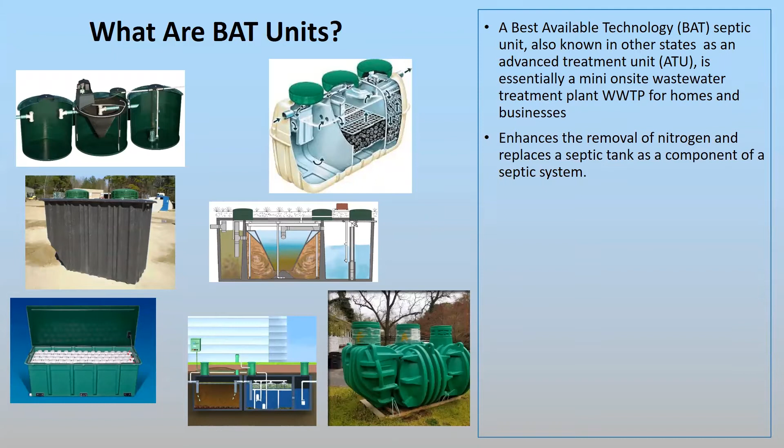So, what is a BAT unit? Essentially, a BAT, also known as an aerobic or advanced treatment unit, as they're known in other states, is essentially a miniature wastewater treatment plant, and it replaces the septic tank portion of a septic system. So you would have a BAT unit directly post the house, and then effluent from the BAT would then go into your existing drain field.

And they are used to enhance or reduce the amount of nitrogen and organic matter that enters the drain field. Now, these systems are required by law in Maryland for certain locations. They have gone through an extensive field evaluation. Essentially 12 units have been installed for over a year, and they've been monitored, water quality analysis, et cetera, and they've been verified to reduce nitrogen by at least 50%.

And then in Maryland, we have what's called the Bay Restoration Fund, which provides grants to homeowners and businesses to install BAT units, and more on that later.

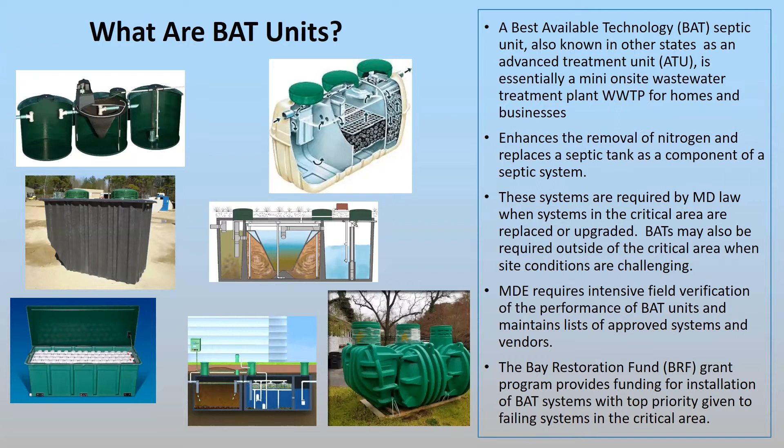So why would you upgrade to a BAT unit? It's important to note that a conventional septic tank provides very little treatment, essentially about 5% removal of the nitrogen. A septic tank is designed to store volume, to settle solids, and to allow any sort of fats, oil, and greases to float up, thereby separating it from the wastewater, which then would enter the drain field. The drain field in a conventional system is where the vast majority of treatment occurs, generally in the neighborhood of 25 to 50% nitrogen removal.

So again, BAT units significantly reduce nitrogen, organics, and the oxygen demand of wastewater. In other words, when you have a lot of organics and a lot of bacteria in that water, bacteria are feeding on the organics, and in order to do so, it requires a lot of oxygen, and that's what a BAT unit essentially does: one part of that unit provides that oxygen to supply the bacteria with what they need in order to break down organics.

And they are very effective in not only reducing nitrogen, but reducing organic load, and therefore they are good solutions for especially environmentally sensitive areas. And in Maryland, the BAT program is focused on the critical areas of Maryland. That's 1,000 feet of navigable waters.

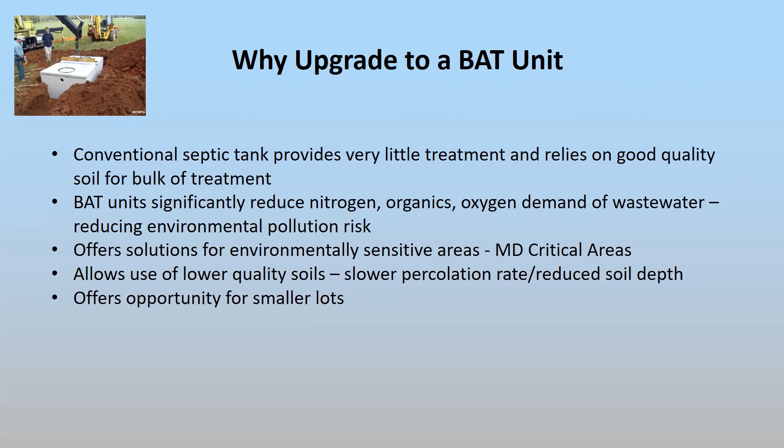And again, they're a good option for smaller lots, and the reason for that is that they provide enhanced treatment, as I mentioned, and that enhanced treatment can help prolong the life of an existing drain field. And on small lots where you don't have any sort of replacement area for the drain field, this offers an opportunity to utilize the existing drain field for a lot longer period of time.

BAT units come in various sizes and can be designed for different size homes and different types of businesses. So they're capable of handling larger flows and also capable of treating varied strengths of wastewater. For example, food businesses and schools, nursing homes, things like that, where the wastewater strength, the amount of organics and oxygen demand and nitrogen greatly differ from that of typical household wastewater.

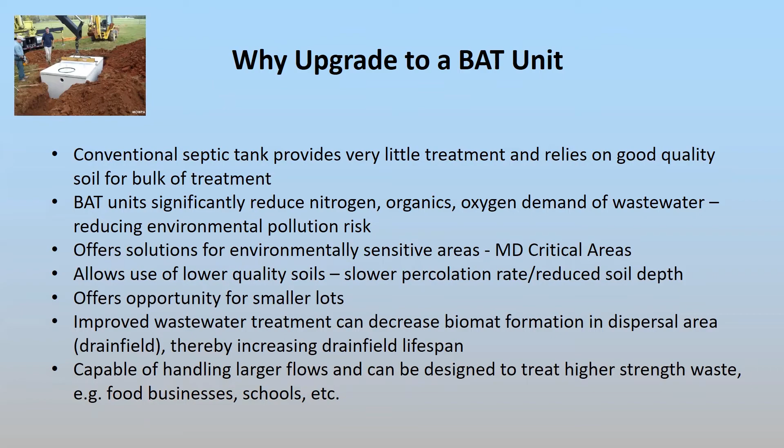Here is a schematic of a generic BAT unit. And basically it is a series of chambers that process the water. The first chamber is similar to that of a septic tank where the wastewater comes in from the home. The solids settle on the bottom and the fats, oils, and grease, also known as scum, float to the surface.

And then that water with lower solids and lower scum goes to the next chamber where aeration is provided to help oxygenate the water, to feed that bacteria so that the bacteria can break down the organics. And then from there, that water goes into another settling zone or clarification chamber.

And then from there, it can be pumped back, go through the system a second time to enhance additional nitrogen removal and organic removal. And then the water then goes out to the drain field.

Now, the important thing about this treatment is that it provides very clear and odorless effluent. In contrast to septic tank wastewater effluent, where it would be very dark brown, you couldn't see through it, and would have an odor. The BAT units help really reduce all the organic matter, the turbidity.

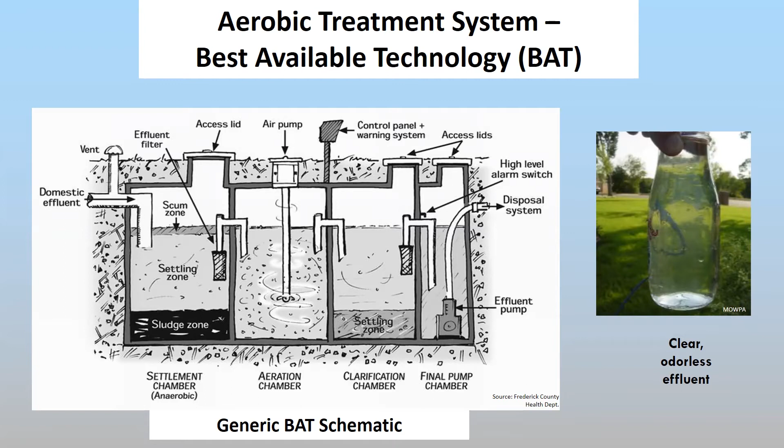And again, that's the reason why the program wants to install BAT units, because it has lower environmental impact, but then also the benefit to the homeowner is that this clear effluent, as I mentioned before, helps to prolong the life of your drain field because it's not adding to organic load that can clog the soil pores, which would then prevent water from infiltrating in.

So drain fields, as I mentioned, in a conventional system are a very important component of a system and provide the greatest amount of treatment, both reduction in nitrogen, but also organics, reduction and elimination of pathogenic bacteria. So the soil is doing a tremendous service in treating wastewater. There are several types, of course.

The more conventional gravel trench system, where gravel is applied to native soil, and then again, the number of trenches would depend upon the size of the home, etc. Then there's what's called chambers here, which basically these chambers are ABS pipe that's been cut in half. It has slots for the wastewater to leave the sides. It basically replaces the gravel, but they're a lot easier to install.

With all the drain fields here, the purpose is to spread wastewater out over the soil as much as possible. And that's what the gravel does. Here's another system here called EZ Flow Tubes. It's basically an artificial media, essentially replacing the gravel. There's the corrugated pipe that's actually inserted within the media. Ease of installation certainly is one benefit. And again, the purpose is to spread the wastewater out over the entire bottom of that trench.

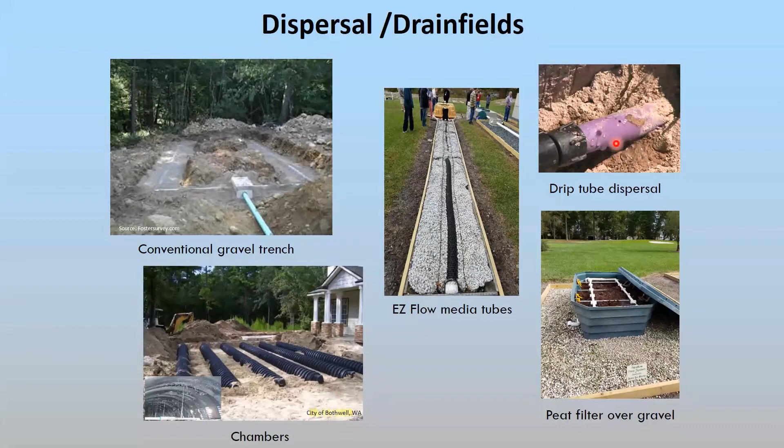In addition, in areas where there is no oxygen, other bacteria convert that nitrate to nitrogen gas, which is then vented off into the atmosphere. And that is good because our atmosphere is made up of about 78% nitrogen. So this is a cycling process, a natural biological chemical process that helps to reduce the nitrogen, and organics as well. And then, as I said, the soil is also remediating pathogenic bacteria.

But it is important to note that all wastewater, whether it's from a wastewater treatment plant or a septic system, does have impact on groundwater. Nothing is 100% removal. So as I said earlier, the septic tank removes about 5% nitrogen. The BAT units approved in Maryland remove 55 to 77 percent of the nitrogen. The drain field typically will remove 20 to 40, maybe 45, almost 50% of the nitrogen. So if you had a BAT and a good functioning drain field, you could remove 66 to 87% of the nitrogen.

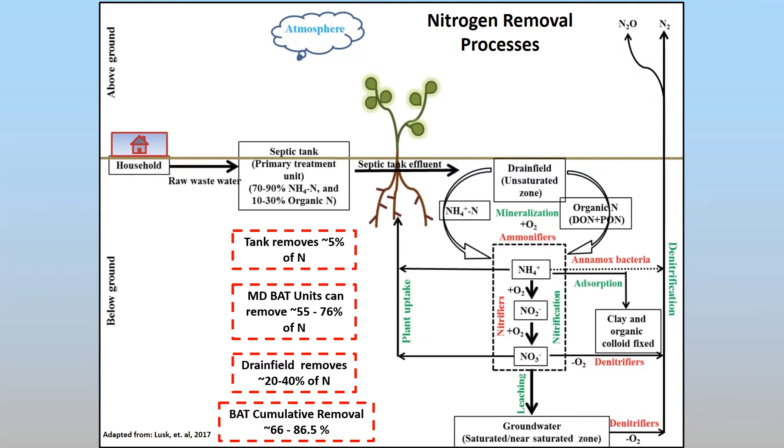The program provides installation and then also a 2-year maintenance contract. Now, it's important to note these prices are based on the Bay Restoration Fund. So if you were to buy a BAT unit outside the Bay Restoration Fund, the prices would be different. And then not all of these units are available in all counties of Maryland.

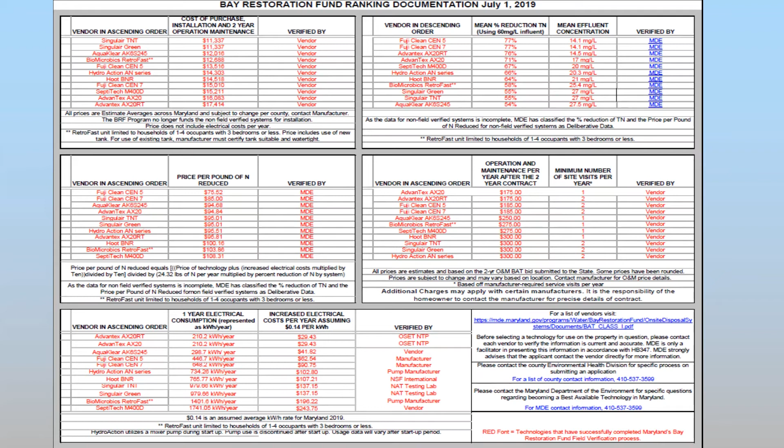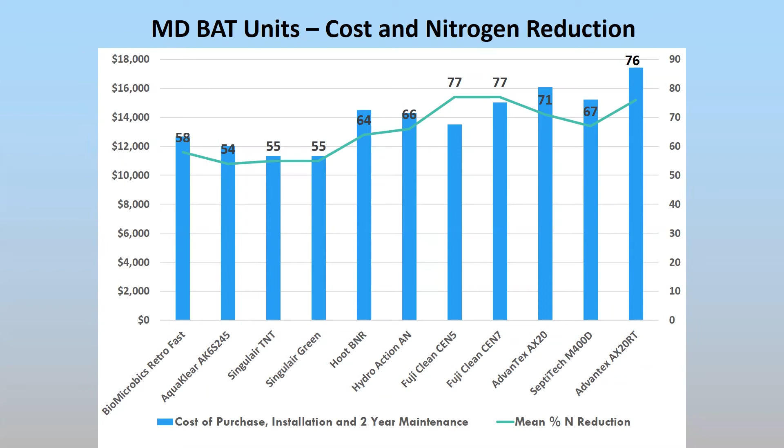Basically, what you have in the system is an aeration device, and that could be a compressor, a blower, or a mixer, and then you have a pump, possibly to pump the wastewater through to your drain field, depending upon what drain field you have. Some cases it's gravity flow, but others, say for example, like a drip irrigation system, you would have a pump chamber.

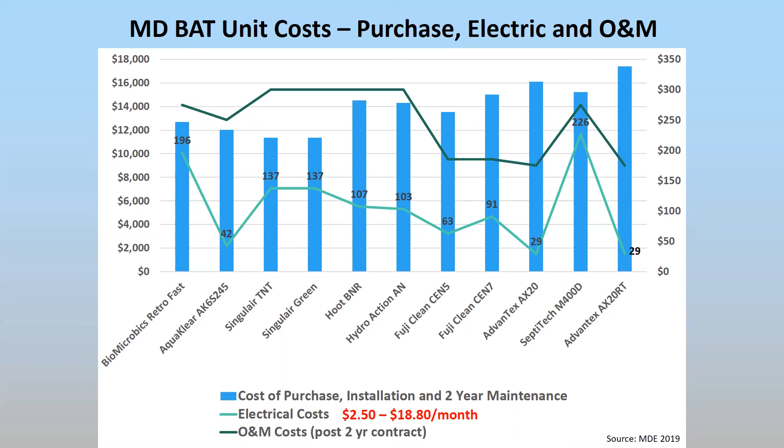So we have the Bay Restoration Fund. This is funded by the $5 monthly fee. And again, it's a cost sharing program. The county health departments administer the program, and each county receives funding based on several factors, one being the total number of septic systems and also the amount of critical areas that particular county has.

And then overall, the program allocates about $16 million to fund the program and provide installation of BAT units. They have modified the program a little bit to help low-income households to repair or replace drain fields. And that's just something that's happened in the last couple of years.

Again, the local counties manage the funding, so you would have to contact your local county health department. Typically, it's the environmental health office or branch within the health department that administers the programs. And again, the grants are awarded based on a fiscal year cycle.

So the Bay Restoration Fund program, obviously, the intent is to reduce nitrogen and organic loading to waters within that 1,000 feet of navigable waters, also called the critical areas. And so priority would be given to those systems that are failing. Say, for example, if your septic tank is leaking, that would be an example of a failing system. And then second ranking would be those failing systems that are not within the critical areas.

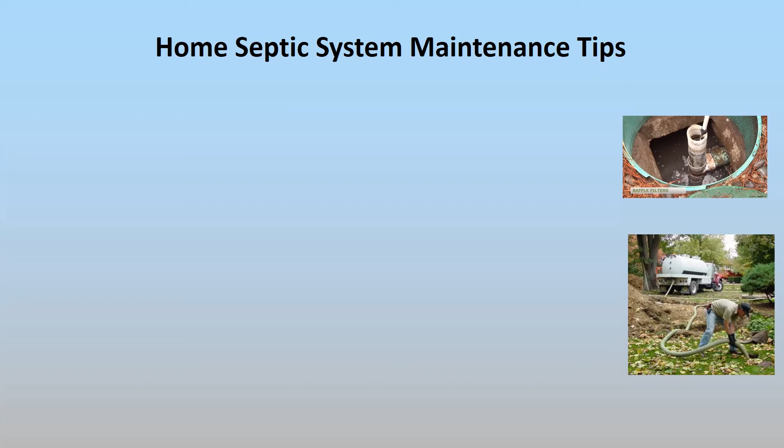So it's very important to follow some basic maintenance practices. These are the more common ones. If you have any leaks, fix those. Garbage disposals and drain fields and septic systems don't mix well. The reason for that is garbage disposals are chopping up food particles and sending out a much higher concentration of organics that have not been processed in any manner. So it really puts a strain on the system and can increase the amount of organics leaching out into the drain field.

Chemicals, with the exception of normal use of household cleaners, can actually kill off some of the beneficial bacteria within the system, and they're not recommended. Paints, for example, or bleach in excess, those types of things will have an impact not only on the bacteria, but can actually increase the clogging of the soil pores.

Also, it's very important to only flush toilet paper. No wipes or anything else. They may be marketed as flushable or septic friendly, but they are not. They can actually clog filters. They can clog up the aeration system. They just don't break down as regular toilet paper does.

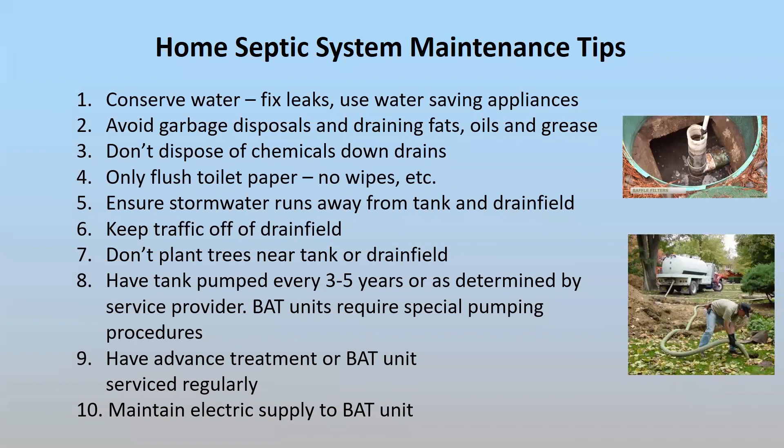So with that, there's a tremendous amount of resources. If you're not in Maryland, most states' environmental offices will have information on septic systems and advanced treatment units. Certainly the local counties have that. In Maryland, we have a wealth of information on the MDE On-Site Systems Division website, including a lot of information about the Bay Restoration Fund, the BAT units, vendors, and service suppliers.

Again, I would suggest that you contact your local county environmental health office. They administer the Bay Restoration program, and they can be a great resource of information. And in Maryland, we also have our industry association, the Maryland On-Site Wastewater Professionals Association, or MOWPA.